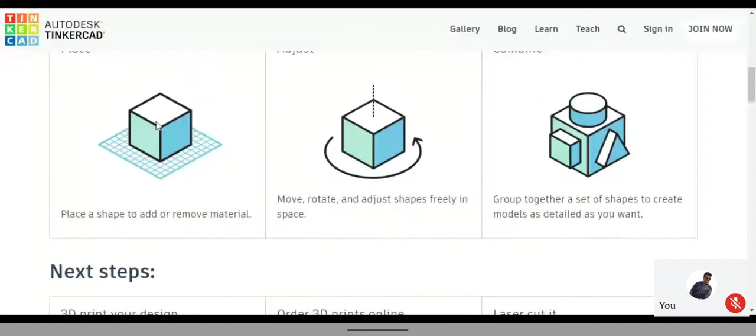We will not be using this one, but we have to discuss what things are used in this one, so I'll just show how it will be. Here you can see this one, like there is an option like 'place it.' There will be a flat platform downside. If you place anything in that one, you can just open that one.

Sir, means we can create our own shapes. You can create your own shapes, like if you want to create a 3D design of your own house, account for it, you can use it, using your own account.

Sir, what did you say? I didn't get you. No sir, it is showing classes also. So no need of that, that one is different. Like if someone is teaching, then you have to join the class, just like this Meet app only.

If I am starting the class, then you have to join the class, right? In the same way, I can start the class in this one, and you can join in this one. Okay, just take an example of this one.

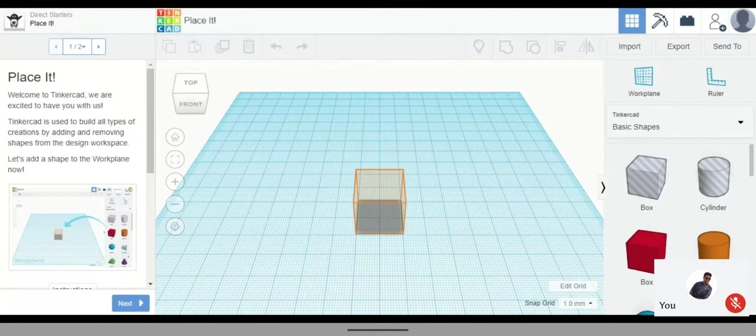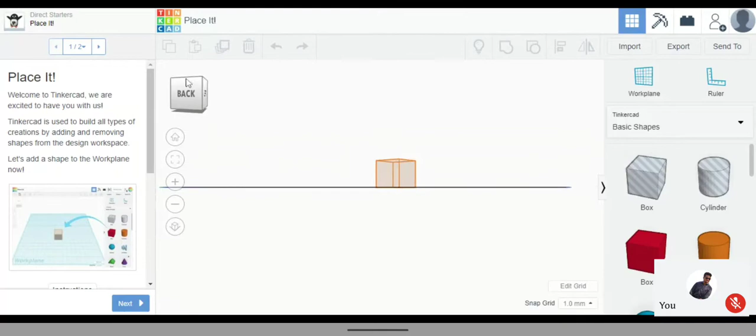You can see here, here's the Workplane, and there will be a flat surface downside. So you can see this one. To the right side, a square will be looking like this, a box shape, and this one will be looking like in front. So you can see that the shape and everything will be also changing. This one's the left side, and if I go upside, see this one will be looking like this. So I can operate it in any way.

Like I can use cylinder also. I can place a cylinder here, and I can set the colors, and it has to be hole or else whatever the things we can adjust here.

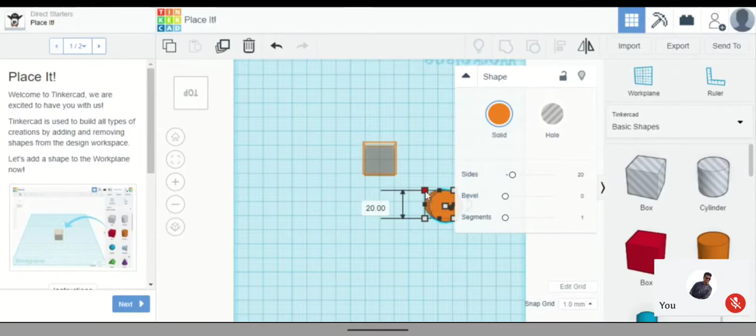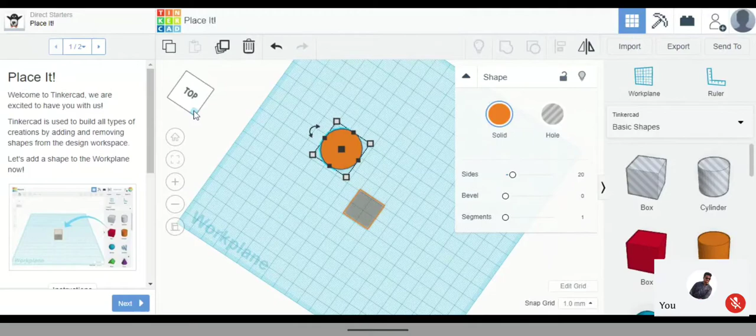Sir, if you want to design a same house thing? Yeah, okay, so if you want to design a house or something, you can easily use this website for designing that one. Mainly, most of the people who want to design any home or any car or any 3D design they have to make, they can use this one.

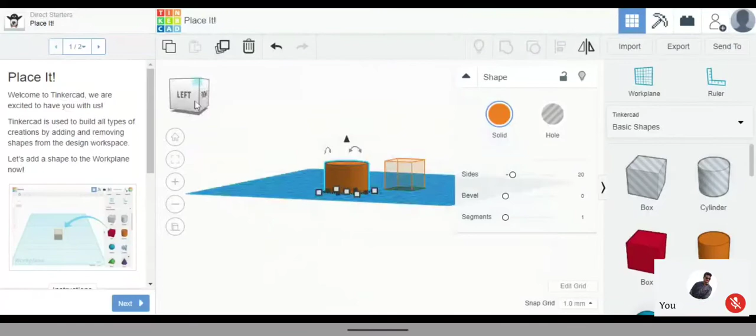And does anyone know how the 3D printer will be working and what is a 3D printer? Yes sir. Okay, just tell me what is a 3D printer and how it will be working. If we do any design or if we need any part, we can print from the 3D printer.

Yeah, whatever you need, you are going to design here—like take an example of the cylinder. It's just a basic thing, like by default it's there. But if you have designed your own thing, your own design, then you can print this one using a 3D printer. Okay, and how a 3D printer will be, and how it will be working?

It will be just like a print. I don't know, sir. Okay, I'll show you a video of how it will be working. Okay, sir.

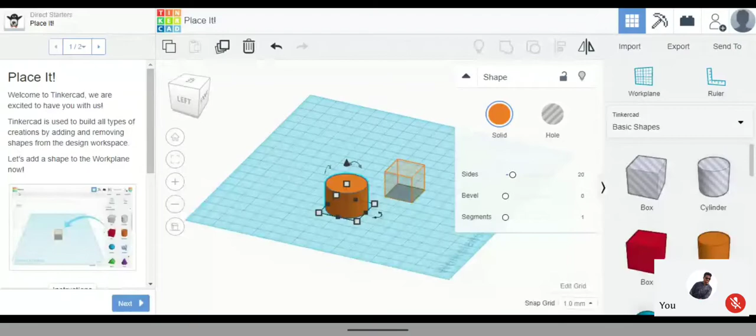Sir, did all the members present? I don't think so, like only 16 members have been presented. Once see the list, sir. If anyone were left, I'll talk with them. Sir, 23 members total they are there in the group, but only... okay, okay, we'll see that, right?

10 minutes, just see this video now. The first step to make the digital design.

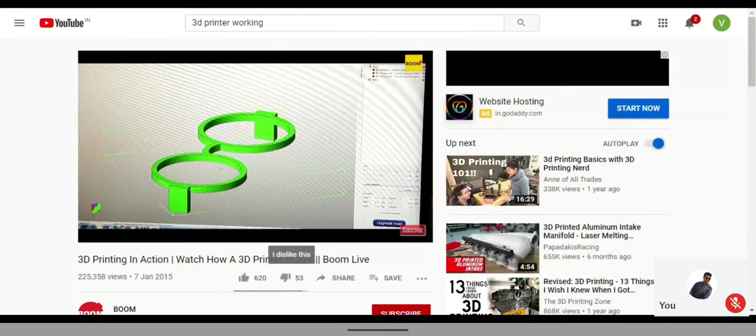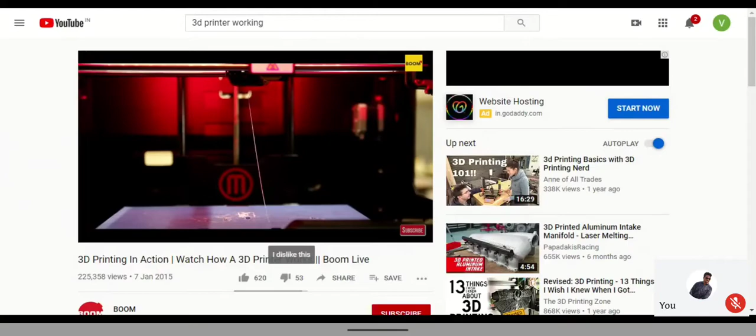So like he's designing specs. Okay, like the example I have shown you how a cylinder has to design, right? In the same way, he has designed that one, and this 3D printer will be like, you know how a hot glue gun will be, just like the same, plastic thing they will be using that one, and it will be melting that and making it into shape whatever you have designed.

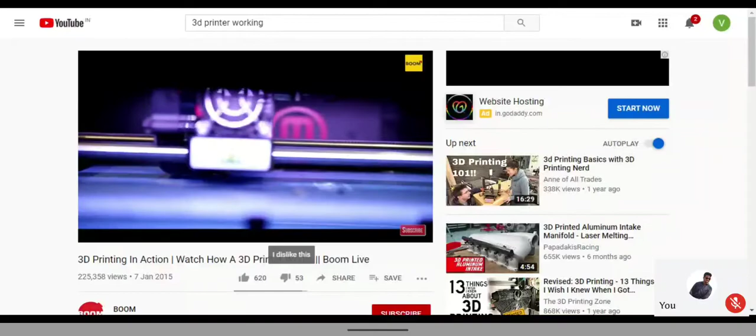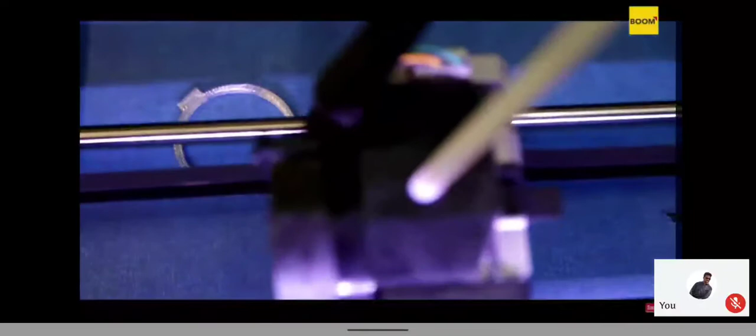See how it's going to work here. Okay, so there it's designing specs.

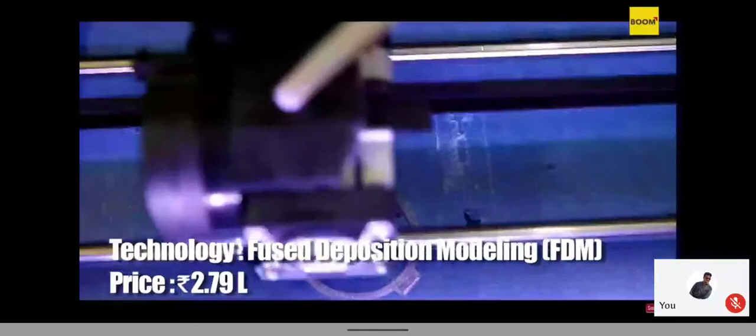So if you have this 3D printer, you can use that website and you can try on your own whatever designs you have in your idea. You can make them.

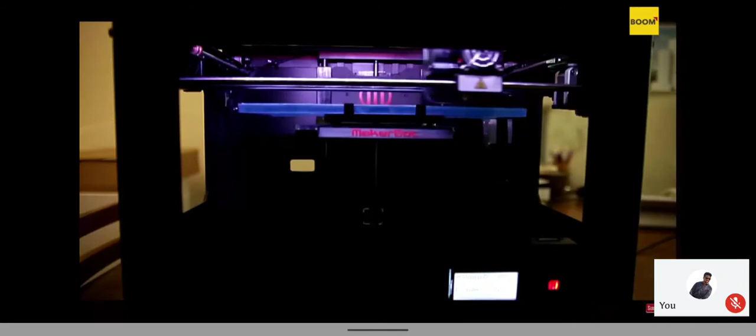This one will be just like a printer only. A printer will be working in the same way, but at that place, a printer will use ink. Here, it's using a plastic roll for that one.

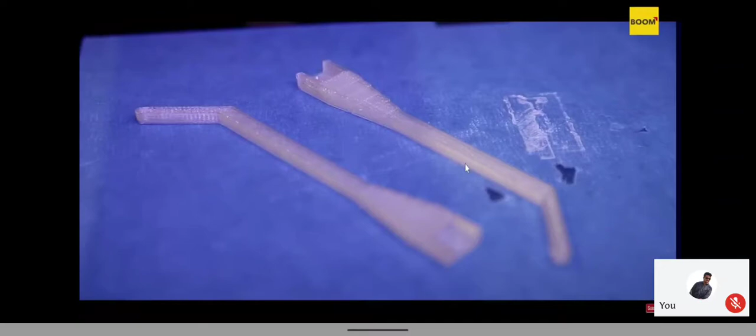Okay, that's a 3D printer, and that's how we can use 3D designs, we can use it that way for designing something and for making use of 3D printing.

The next one is circuiting, like Arduino circuiting or else any simple circuits. If you have connected a battery to an LED light, what will happen? The light will blink. If you have connected a switch in between the battery and the light, what will happen? If you turn on the switch, then only the light will work, right? So this is also there in Tinkercad.

And the next one is block code. Block code means, I think you already know what block code is. Everyone has used Scratch software, right? Everyone has some idea of how to use the Scratch software, like what are the things in Scratch software. Everyone knows, right? Yes sir. The same thing can be done in this one also.

Okay, we have three things in this one: 3D design we can make, or circuiting like Arduino circuiting or simple circuiting we can make, or directly block code also we can make.

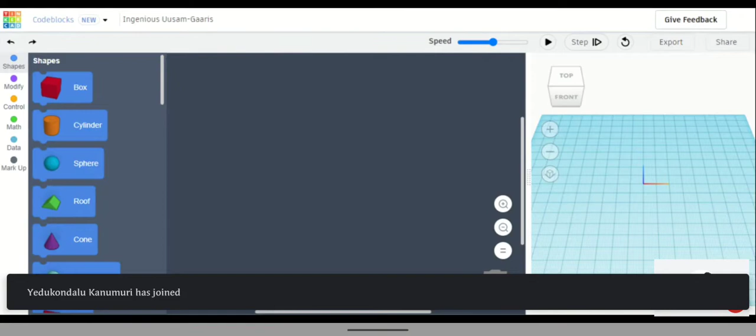But in this virtual software, you can't do anything to a physical one. So that's why you have to select one of these shapes. You can make your own shapes also. For now, I'll select this box. I'll drag this one and keep it here.

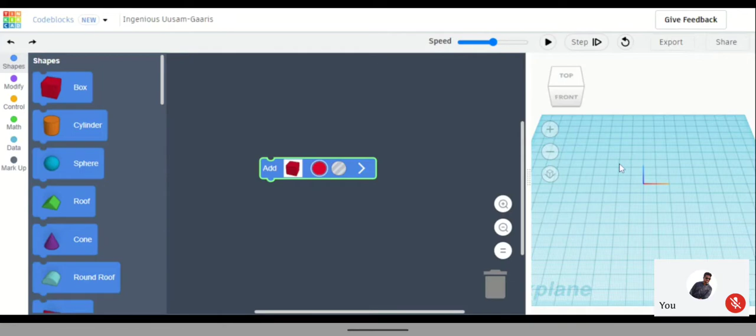See here, like adding a box into this, how it will be. The left side will have these options. Here you have to make code, this blank place is where all the things are. You have to do the programming here, and you can see the result here, just like Scratch software.

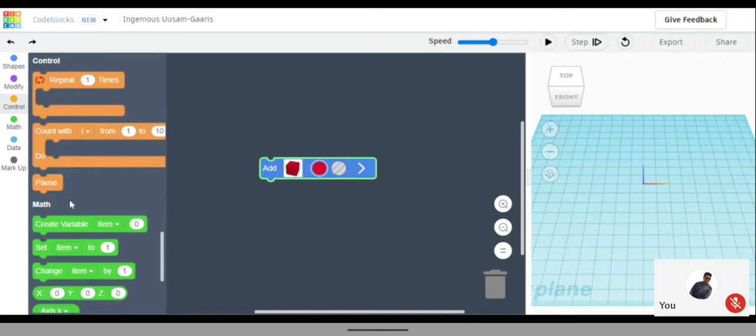See here, like modify, if you want to create a new project you can use this option. If you want to copy any object from another program you can do it using this one. And in control, see here, repeat means loop options, count option, pause option is there. Pause means wait for, like we will give some time for something to happen, the same way.

And here we have math blocks, like x-axis, y-axis, and variables changing, and degrees. These are all the things. And the next one is data and markup. Data and markup are just extra things, if you want to program variables. If you want to create your own task, you can use markup and data for creating that one.

Okay, so now we'll go to this one. Sir, what is markup? Markup means, yeah, I'll show you that one.

It's not coming now. Okay, like if you have designed something here and want to create your own variable, that design has to work something, like it has to say something, or detect something - it is not a variable here. So you can create this variable using data and markup, and you can save it into a list, and use the same data and markup in the next program also. It's not the case in EV3 or Scratch.

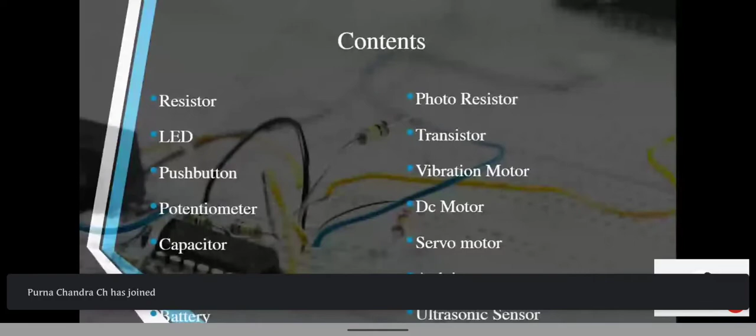Anurag, yes sir, that's the correct thing. The resistor will reduce the electricity flow.

You can't just put everything into the power plug, like if you want to charge a mobile phone, how will you charge it? You can't directly put the plug into the plug point and charge it, right? You will use the adapter in between. Why will we use an adapter?

Sir, that is to convert the AC current to DC current. Yes, for changing AC into DC and also reducing the power. You can see that one, like 5 volts 2 amps or 9 volts 2 amps. It will produce only that electricity from the adapter to the wire, it will not produce more energy and will not push more energy from the adapter to the wire.

Okay sir, and what is an AC current and DC current? Can anyone tell? So AC current means alternating current, DC current means direct current.

Direct current is less powerful than alternating current, and we can get more. Most of the big electricity things are of two types, alternating current and direct current, sir. Alternating current means it can supply more power, more items than DC.

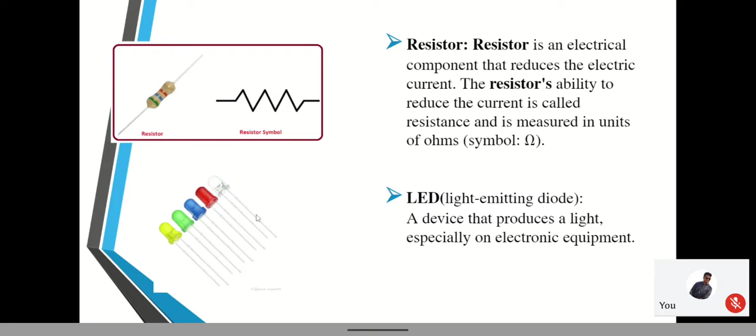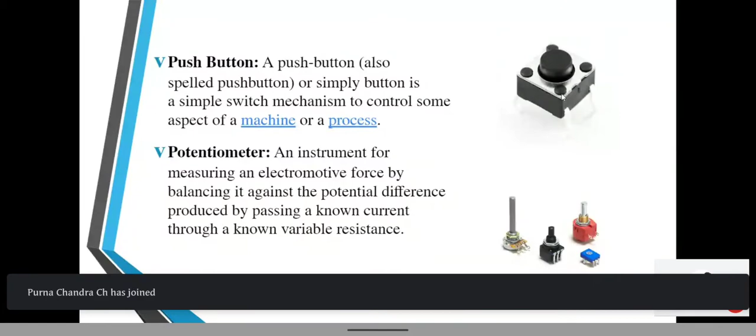Let's read this out: the push button, also spelled pushbutton or simply button, is a simple switch mechanism to control some aspect of a machine or a process. Yeah, that's the thing, right?

Take the example of this electronic bat for killing mosquitoes. If you press the button, only then electricity passes through the net and you can kill mosquitoes. Without pressing it you can't do that. The same way, electronic devices used in kitchens, like a coffee mixer, will also contain the same button. We can use it for turning the circuit on and off, just like a switch.

Arya, tell me, this one is also a push button, sir, just a different, blue color. Arya is showing it, just check his screen. What he's showing is also a push button, but a bigger size. For some kinds of buzzers or other cases, they will use that one, but it also works the same way.

This button, we'll use it in Arduino too, right? Yes, this big one and the small one can both be used in Arduino, based on our need. It has LED lights also at the edges, so it will glow. If you want to make a model where the push button has to be highlighted, like the Google Home you made, he used the same thing there since mainly a push button is needed. That's why we used that bigger size push button. If the push button's character is less important, then you can use the small one only.

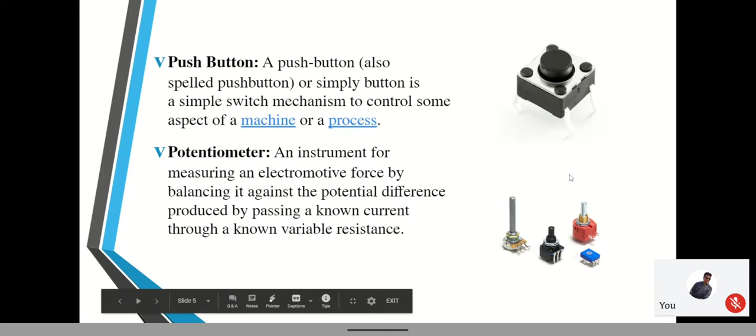Sir, in remote control cars, for owning and offing. Sir, for speakers too you slide.

So it's nothing but a mechanical switch, a part of switch, a different type of switch. A push button can also be used as a switch, so there are different types of switches. This one is characterized as a slide switch because its on and off action is done by sliding. The switches we use in our homes are also on and off, but in a different manner, not sliding.

The next one is the capacitor. Can anyone tell what a capacitor is? It's a device... Sir, it will be used for motors. But I'm asking what is the use of a capacitor. It will control the energy.

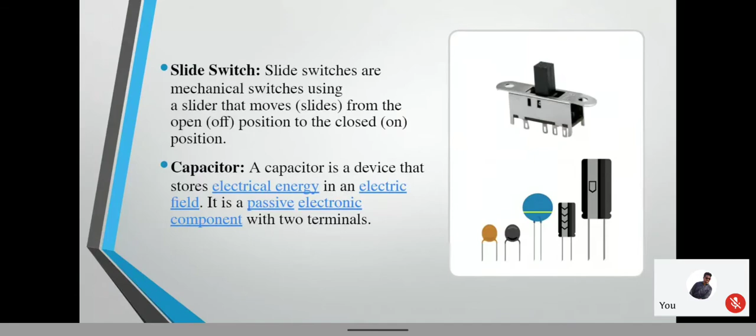On the exhibition day, that was the last day for us, we didn't think that would be the last day. After the exhibition we got holidays for 3 months, and it's going to continue for at least 2 more months. Even the whole year we should not care, maybe August or January. They're saying schools might start a little earlier, like August, October, or November, depending on how the vaccine works, so it will take some time. It's better to do classes online, but the problem is all schools can't conduct online since normal schools can't afford a mobile phone or a laptop. So that's the problem we have in our school too.

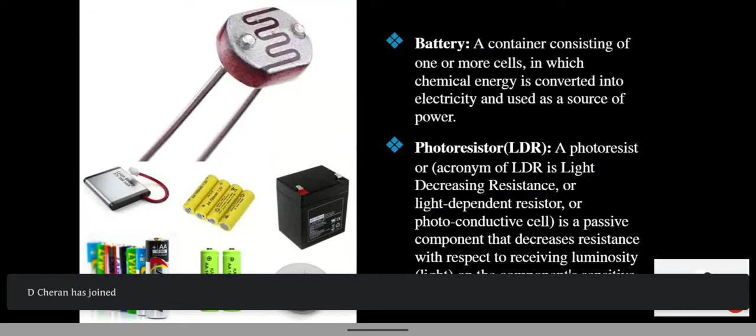So photoresistor, it will depend on the light. So it will regulate the flow of electricity. So the next one is battery. I think everyone knows what is a battery, right? It will be a source of electricity which can be stored in a small device and can be carried anywhere, right? Electricity we can't carry anywhere we want, but a battery we can, right? We can store the electricity in the batteries and carry wherever we want. Okay, so here we have six types of batteries for different cases, wherever it wants and whatever the capacity it wants, we can use that one.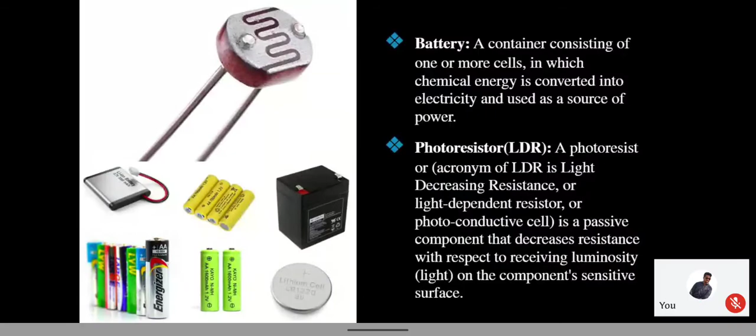Can anyone tell? Positive, proton, negative, neutron, electron, neutron, proton, neutron. Proton, neutron, proton, something like that. Maybe, actually it's negative, positive, negative, or else positive, negative, positive.

Okay sir, okay. So the left one is emitter. What is emitter means? Can anyone tell what emitter means? Like you can see this one. While they are giving a power supply to the house, what they will do? They will not give only 2 wires. And in the plug point also you can see one positive, one negative, and in the middle upside there will be something like a round shape, yes right sir? Why sir will they be using that one? That is for controlling, yeah, that is for the earth.

Without that one, there is a chance of misplacing the electricity. Like if you give electricity to any CPU - yeah, this problem we have faced in our robotics lab, right? For the first time, when they have given this earthing, there was a problem. Yeah, without giving earthing, what was there? Like if we are touching the CPUs, we were getting one shock, that type of shock we were getting. Yeah, we were getting some shock, right? Yes sir. Same thing, they have to give earthing.

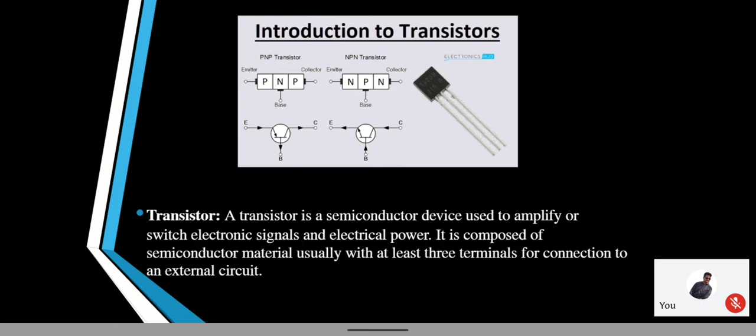In this you can see, a transistor is a semiconductor device used to amplify - setting the amplify - the switch electronic, it will switch the electronic signals. It will switch: however much the collector needs, that much only it will give, and the remaining will be switched to the other circuit, and it will be grounded without any problems.

So the next one is motors. We have different kinds of motors, so we will be starting with the vibration motor. Can anyone tell where we can see the vibration motor? In gaming game pads, in most of the game pads, we'll see them.

In game pads - what is a game pad? PS4 console, like that. In PS4s and in phones also, if we keep it in vibration mode.

Nowadays this vibration motor contains a lot of things like haptic feedback. Everyone needs it - if you are holding that one, it has to give some vibration so that you'll get a good feel about the mobile phone. While you are texting also, you'll be getting some vibration - while clicking some alphabets like texting, you will get some vibration. It will not disturb others, it will just be known to your hands.

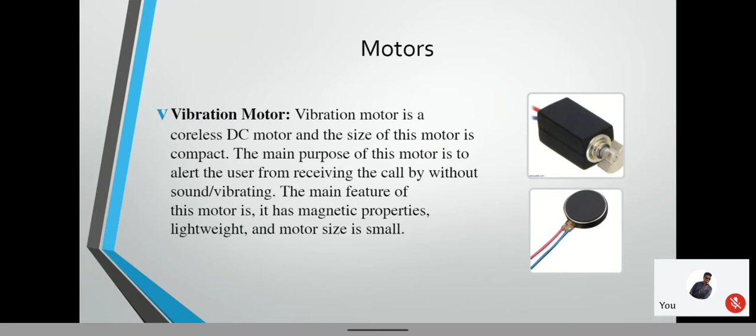That's it. So there have to be different kinds of vibration motors - it should not only give high vibration, it has to give low vibration also, that can be easily notified by our hands without disturbing anyone.

So these are different types of motors - vibration motor, and the next one is DC motor, and the last one is servo motor. I think everyone knows what is a DC motor, right? In remote control cars and most places wherever a motor has been used, mostly the DC motor only will be used in that.

If you use the positive terminal reversely, the motor will be rotating in reverse direction. If you use the positive and negative correctly, the motor will be moving in the right direction.

So there isn't much to this one, I'll just explain simply. Inside this motor there are magnetic coils. Electricity passes from positive to negative, and it uses magnets to rotate the head, that's why it rotates. The magnets push from one direction to another. Inside there's copper wire and magnets that rotate when connected to electricity. And the last one is the servo motor.

This is the servo motor. Why do we use a servo motor? Why can't we use a DC motor? Arya, can you tell me why you used a servo motor in the automatic dustbin instead of a DC motor?

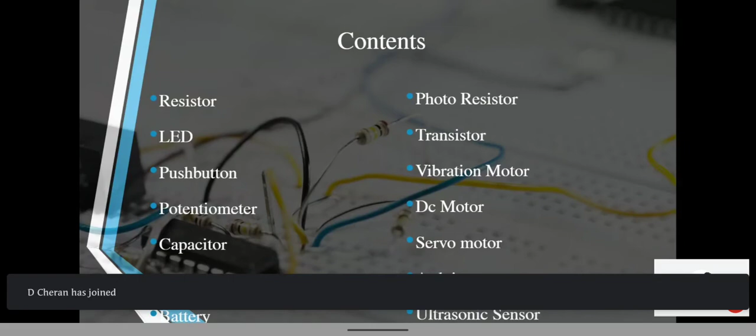So we will try to get Arduino also, but because of this problem it may delay for some time. We'll have to bring our own boards. If everyone can buy, we will see, if they can't buy, we will go virtual only. It will be better for doing this.

Sir, is the competition at home base this year? Yes, competition is there this year. I'll tell you something, there is a doubt whether the school will open or not. In this case, will they conduct any competition?

Actually, there's no chance of conducting a competition. We didn't get permission for conducting it either. I think you've seen this in the news. There should be no extra fees remaining, like you have to collect only tuition fees. The school has got restrictions on that, right?

So robotics is an extra subject which should not be mandatory for everyone, right? In this case, we can't conduct this for everyone and tell them to join our class, join our class. If there's a problem, we'll just be kicked out of the school. That's why we called you personally, and your parents, and asked permission. If you're interested, you can join.

Now, do you know the strength we got? 80 members total, from 6th to 10th class. In these 80 members, how many will join at the last, I don't know.

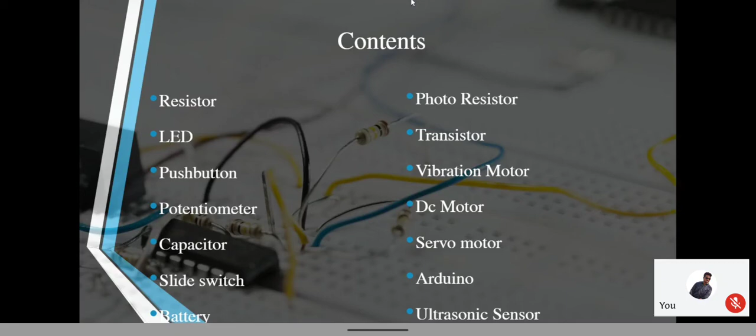So I've started the class, it may depend. For this permission only, it took a lot of time. I've gone to schools a lot of times, nearly 4 to 5 times, to meet the sister and take permission.

I don't think this will be continuing this year. We have to see, it depends on us. If interested people become more, and if their parents are willing to pay the extra fees, then it may continue. If the parents are not willing to pay, and the strength is very less, we can't continue for this year, right? We have to see about that.

Okay sir. Until then, we will be teaching you, so you can start with the basics and try on your own. If there's any information, we'll let you know, and if there are any changes, we'll let you know too.

Let me just take the attendance now. I think someone left. Only 11 people are there.

In the next class, we will learn what Arduino is, what ports it contains, and why we'll be using different kinds of ports. We'll also learn about the ultrasonic sensor, and in that class we'll start circuiting too, from simple circuiting.

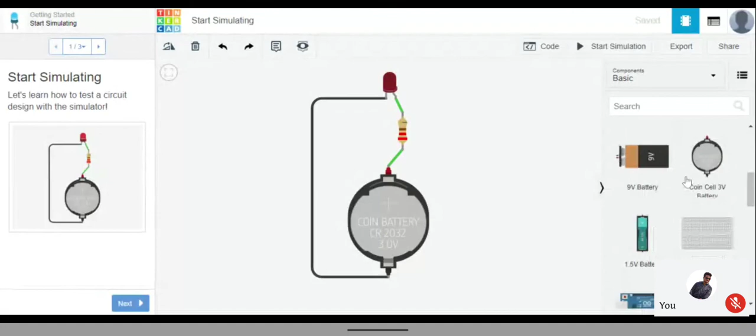Ananta, just wait. Okay, so these are the contents we have here. If you want to try something, don't use any Arduino, just try this simple circuit. You can try that on your own.

Just wait a minute, I'll take the attendance. Okay, first, Blessing Satvik. Present, sir. Anup Prasad, he's absent, right?

Jayavardhan, he's not getting it. Absent, sir, he attended the class and left, sir. Who, Jayavardhan? Yes sir, starting he came and he left again. When did he leave, in the middle, at the last, or in the first? Starting itself, just 10 minutes, sir, then he went off.

Then I don't want him in my class again. Sir, Mukunda, because his brother is writing exams, sir, that's why he left. Okay, I can't do anything about that. He can use his mobile phone and join, it's not a problem, that's why I'm recording everything.

So I will be placing this on YouTube if you want it for reference.